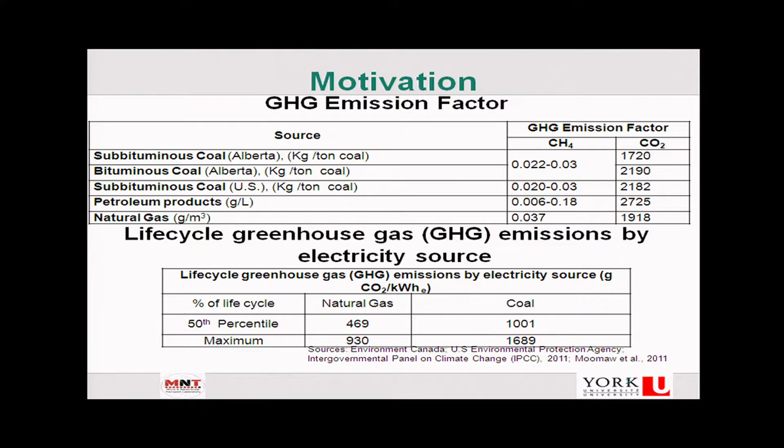I call this king coal, because coal still dominates the energy landscape, as I mentioned, among the various sources. And typically in India it is not a high grade coal, so there will be a lot of ash content, and that also creates a lot of pollution and so forth. These are some of the numbers which show the amount of GHG, greenhouse gas emission, which people are worried about in terms of burning coal.

So the question posed is, is there an alternate route without burning coal? Coal is a big chain carbon molecule, with nitrogen, hydrogen, sulfur; you can think of coal as a polymer in some sense, a thick meshy polymer. If you burn that, you will get CO2 directly. So is there a way to convert the coal into methane? Because if you convert that into methane, there is a significant reduction of GHG.

And if you look at the scaling, typically in India thermal power plants are in the 500 to 600 megawatt range. These are typically run by a corporation called National Thermal Power Corporation, NTPC, with 500 to 600 megawatt units. So if there is an opportunity to replace some of them using methane, it would be a significant cost reduction.

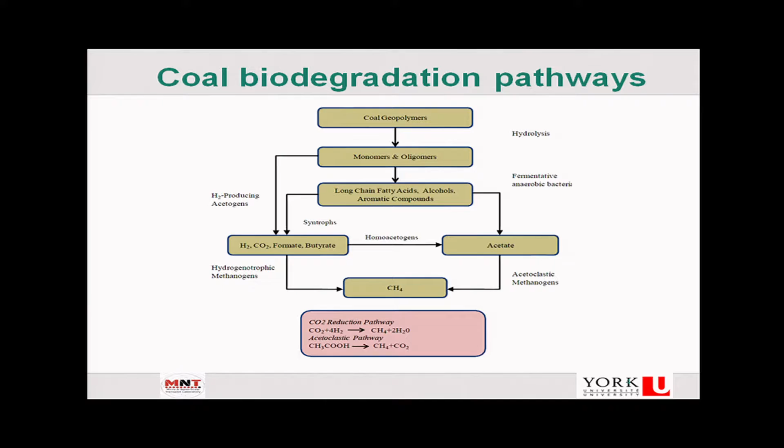So you will also get CO2 at the end, but of course the amount of CO2 is much reduced compared to if it was a direct combustion. So this is a complex biodegradation pathway, and the way we looked at this problem is similar to flow in porous media. Typically microbiologists take the coal samples and put them in a bottle. These are called media.

In the bottle, there is a head space in the media, and they will typically have nitrogen as inert media, and then they will put the methanogens and allow them to culture. The methanogens will then convert the coal into methane, and from the head space you take the methane or any other gas out, put it into a GC, and look at the gas composition. This is typically a bottle experiment, which is static.

In a coal field, things are not static, because this is below the earth's surface; you have flow of water, flow of other microbes and so forth. So we took the idea of core flooding I showed you earlier, which you do typically for porous media. We can pack these coals within a core holder or in a porous packed bed, and then feed these methanogens or microbes.

In order for microbes to survive, any idea what they need basically? They need a carbon source, or nutrient. So you have to feed some nutrient to it, so that they can thrive in that packed porous media. So we provided some nutrients. In this case, the carbon source is tryptone.

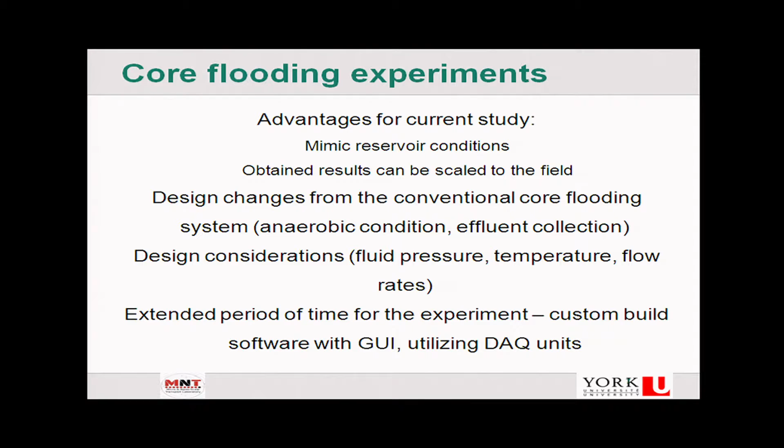So when you are dealing with this kind of system, you have to purge everything with nitrogen, so the entire system is inert. And also when you are putting in inoculum, the medium has water. Water always has dissolved gases, and typically oxygen will be one of them. So you have to take oxygen out from the inoculum medium. This can be a tedious process as well.

So this is a very complex system, really a mechanical engineering or chemical engineering process system. This is a process diagram we developed. Because it has to run for 50-60 days, it cannot be done manually. It has to be completely automated with some sort of GUI running, so that it helps to collect data automatically.

So essentially you have an upstream where a syringe pump is injecting the microbes, the nutrients and so forth, and downstream you have the so-called holders which help to collect the effluent, and then you can pass that effluent on for further analysis. Okay.

So this is what the system looks like. I always ask my students to have these experiments on a trolley kind of setup, which looks very neat, and you can move things as needed. This is the upstream side. These are the syringe pumps, typically from Teledyne, and then the downstream as well, where you have the piston accumulator, because everything needs to be pressurized.

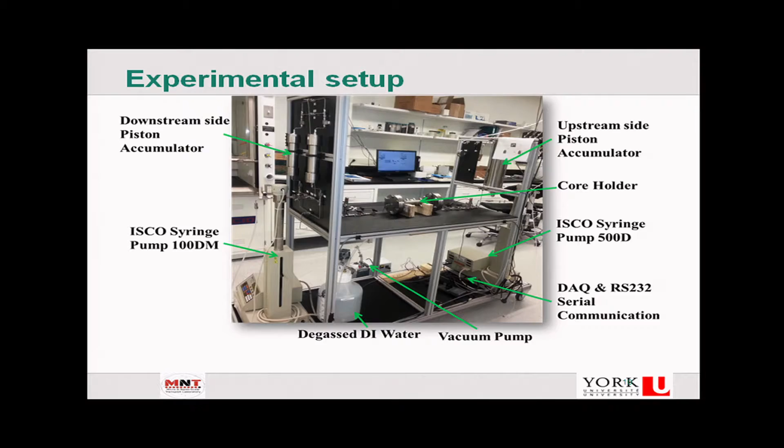We made this kind of GUI, and I believe you guys are much better in software development. This is using LabVIEW and CVI; we're programming in National Instruments CVI. You can make an emergency stop if there is a malfunction. We also had a camera, so for example at night, if there was a spill, we can shut down the entire process from home via IP address.

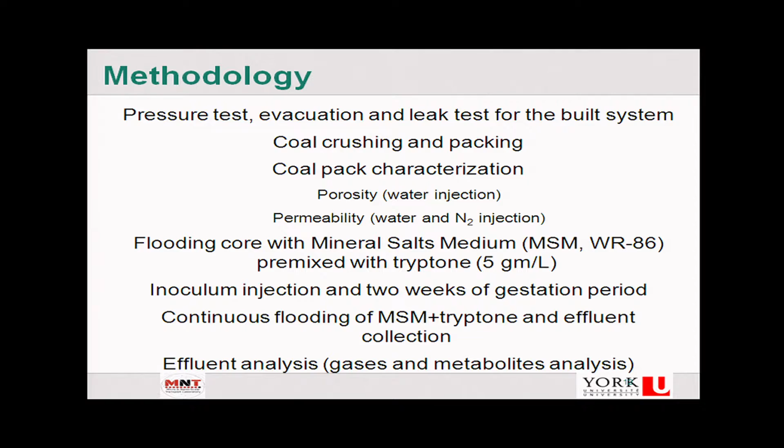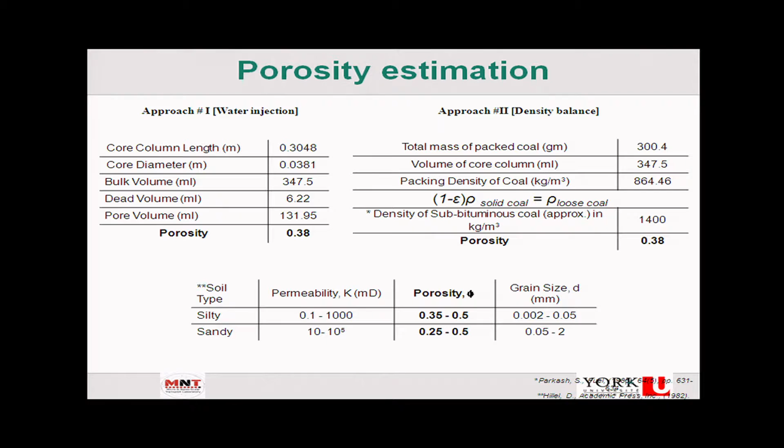So we measure a lot of transport properties like permeability, porosity, and so forth, which are important to characterize the porous media. As you can imagine, it went for 90 days, so you can collect a lot of data. For example, we can look at the porosity using water injection. As I mentioned, there are two different ways of measuring porosity: one is through material balance, and the other is by using water saturation.

When you calculate the permeability, you can then do some correlation. There is a famous correlation called the Kozeny-Carman correlation, which provides the permeability. The Kozeny-Carman correlation assumes that the particles are spherical, the way we have seen for the glass beads experiments before. So one can correlate those things as well.

And also, this is very interesting, which you will not see in most porous media: over time there is a permeability variation. And when I look at the SEM, I can take the coal at various time intervals, since we have the opportunity to unpack and take the coal sample.

For example, at the very end, after 90 days, there is biofilm formation, the attachment of the microbes. You can see the microbes attached to the coal structure. There is a proper formation of the colony, so to speak, of the microbes. That's very critical, maintaining that kind of proper colony formation.

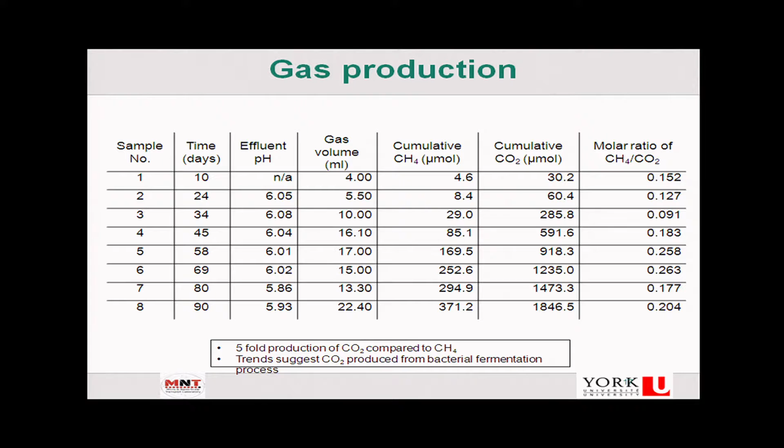We can look at what are the molar ratios of methane and CO2 and so forth, because as I mentioned, there are pathways that not only produce methane but also CO2. These are soluble, right? So you have to do some solubility correction. So how does one do solubility correction?

In chemical engineering you should know: by using Henry's law. You can use Henry's law to correct for the solubility, because as I mentioned, the CO2 or methane will be present within the effluent. So you have to make some solubility correction to get the actual quantity of carbon dioxide and methane. You can see the values with and without solubility corrections; these are experimental values that are shown.

In terms of your question about economics and whether it makes sense economically, the advantage is you are getting other value-added products like acetic acid and succinic acid. If you are in chemical engineering, you may be aware succinic acid is used in the pharmaceutical industry in a very big way and is very expensive as well. However, through this bioconversion pathway, you can get succinic acid at a very good rate. So these are the value-added products you can get out of this process.

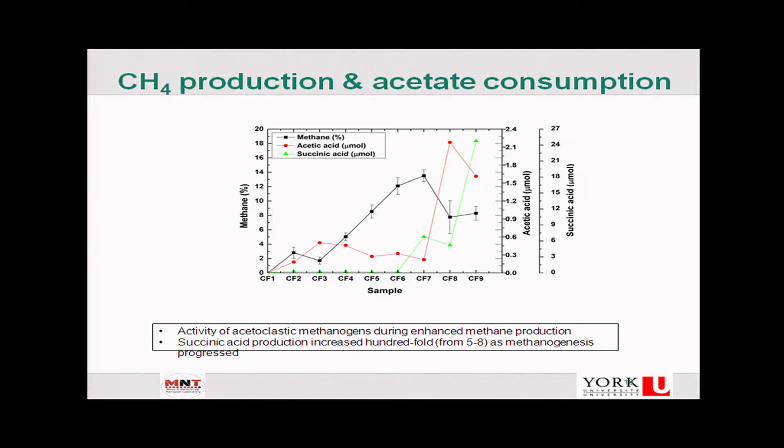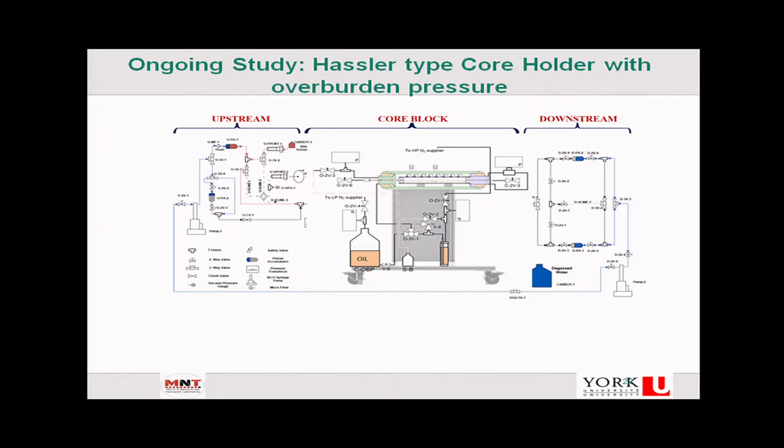Then you can put some overburden pressure as well, to look at the impact of pressure in the system. In this case we maintained a constant pressure into the core through an oil system, and we designed these core holders. This is now the biggest size when you maintain the pressurized system, and we always make sure health and safety is paramount in our work. Visitors shouldn't jump inside the experimental setup; sometimes people get so excited they want to touch it, so we make sure people are not getting inside.

With this new system, we also have a number of pressure and temperature taps. One thing we were interested in is the natural temperature, because these methanogens thrive at a particular temperature. We want to register the temperature change in the system and what the optimal conditions are.

So I think this study gave us a way to understand that, beyond typical combustion, as an energy source we can use advances in microscopy as well as flow in porous media to tackle these kinds of challenges.

Okay, and of course in this work I have the entire team, which has people from geophysics, because we have to understand how the geological formations of coal are. Then there are hydrologists, people who look at the water chemistry.

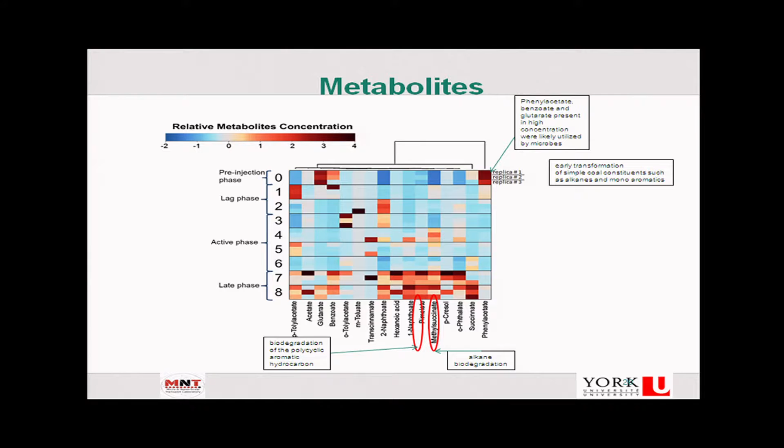Any questions? Okay. So next, let's look at another part of this energy, which is the fuel cell. A fuel cell is an energy conversion device which directly converts hydrogen and oxygen into electrical energy. How many of you are aware of fuel cells? Anyone? Not much, so I may provide you some more background on this.

Typically, there are fuel cell cars, and now people even have battery operated cars. For example, Tesla, Elon Musk, is one of the pioneers of battery operated cars. These are lithium ion battery operated, but there's a big difference between a fuel cell and a battery. The fuel cell is an energy conversion device, whereas a battery is an energy storage device. Let's look at what a fuel cell looks like. A fuel cell at its heart will have something like a,

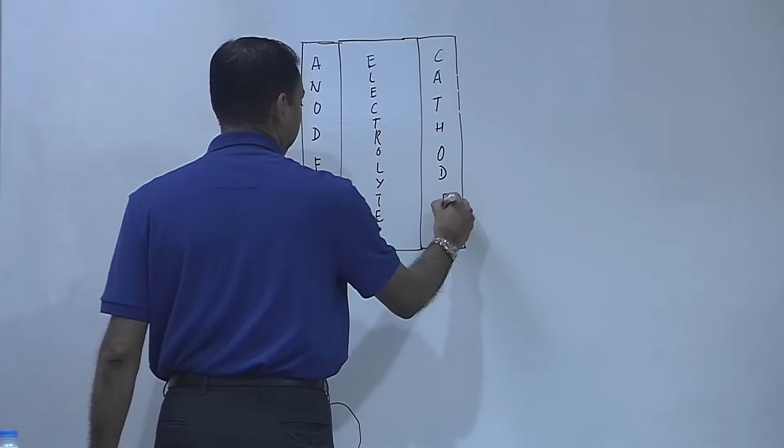So you have the electrolyte, and then there is the cathode. These are electrodes, and then there are flow paths, often referred to as bipolar plates, which provide the flow conduit. So in a fuel cell, this is pretty much the structure: an anode, a cathode, and an electrolyte sandwiched in between. Then, for example in a hydrogen fuel cell or a PEM fuel cell, you bring hydrogen, which is the fuel.

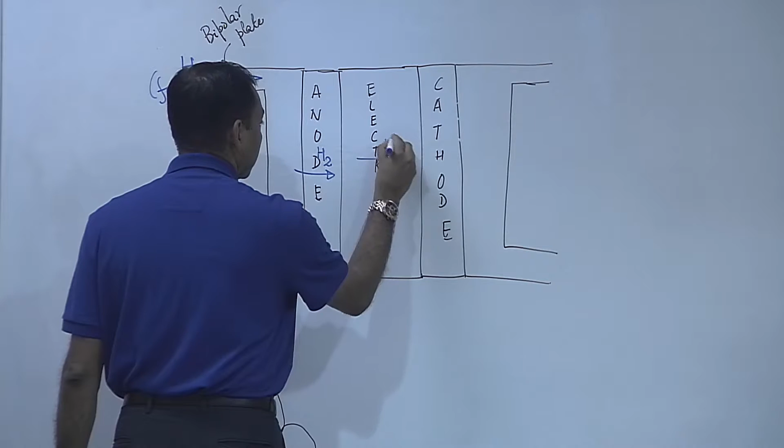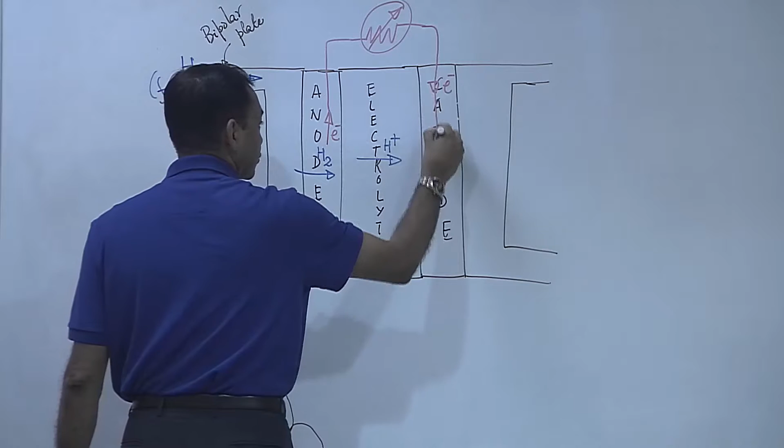Hydrogen will go inside through the anode. Then it will create protons, and while creating protons it will leave electrons out. These electrons will move through the outer circuit, and this is where you can put a bulb or something and generate electricity. Then these electrons will come in contact with air, or in other words oxygen. The oxygen will come in, they will react and produce water.

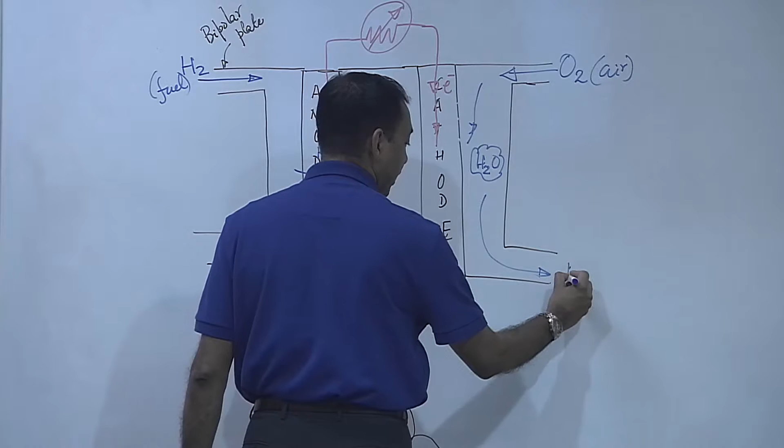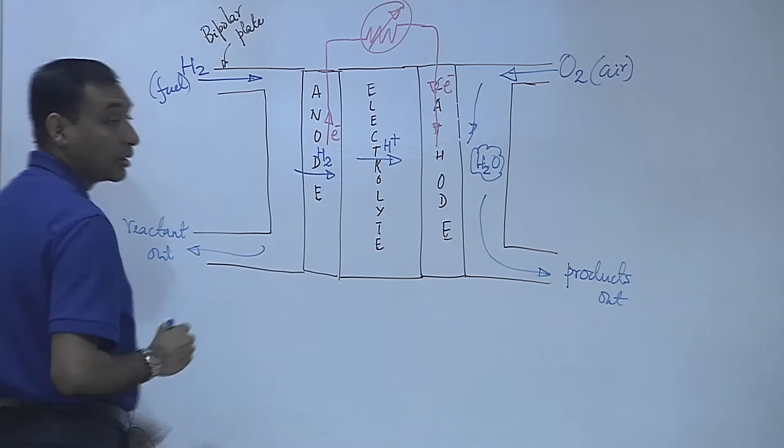Excess oxygen and the products go out. So this is where the reactant, or the fuel, goes out, and this is the product out. So this is what a fuel cell looks like: hydrogen and oxygen forming water. The water produced is always a challenge, because

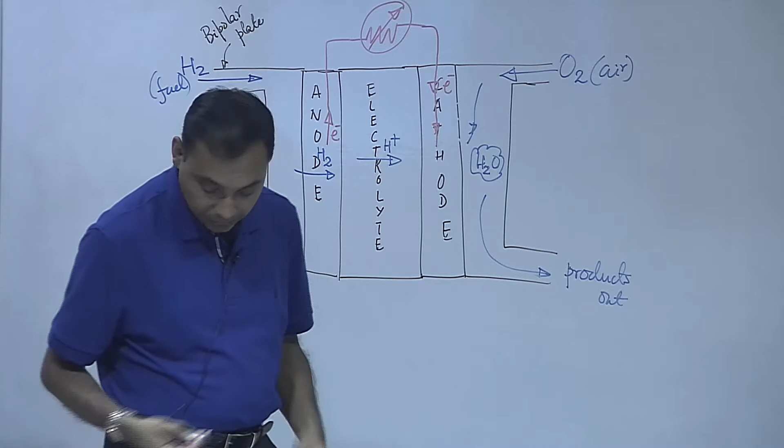if I look at this part of the cell and zoom into it, what I will see is it is made up of a lot of fibers. These are fibrous material, referred to as the gas diffusion layer. So essentially the gas diffusion layer is a porous media.

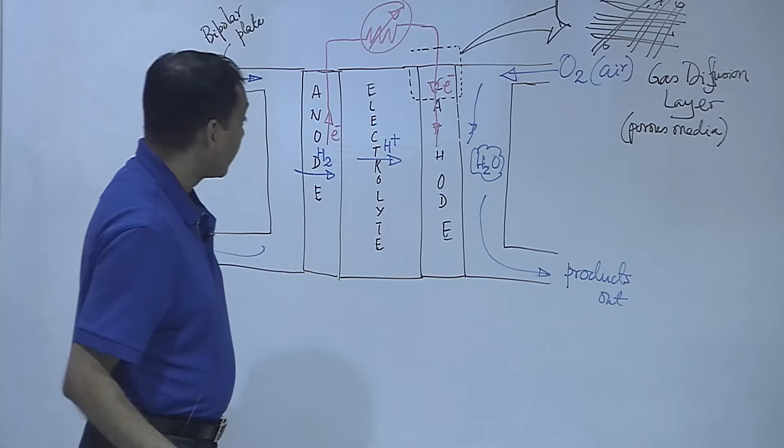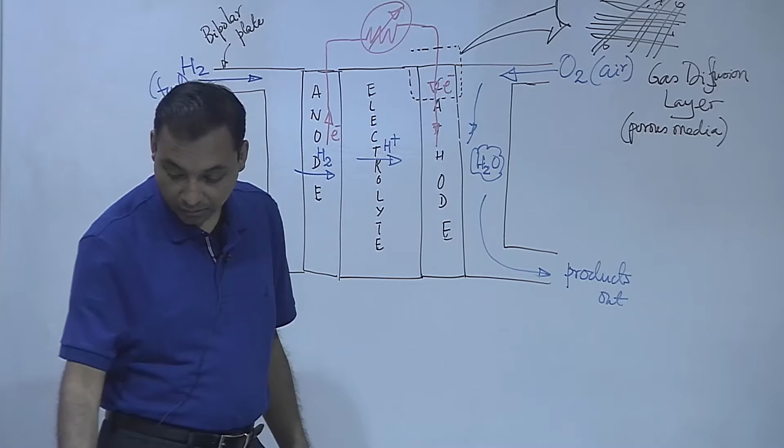So when you are operating this fuel cell, you don't want water to block the pores. This porous media has pore sizes somewhere in the order of maybe 100 microns. So this is both the cathode and the anode. These are porous media, which is referred to as a gas diffusion layer.

Typically, the commercial name of this product is Toray paper, or a carbon cloth. But as I mentioned, this water that is produced can be detrimental to the fuel cell because it can flood everything, right? If there is flooding, then the reaction may stop.

So how can one prevent this water moving back? What is the way you think we can arrest water? Keep the whole setup pressurized so that the water cannot move. Well, water will go through some gradient, right? So there could be some diffusion of water in the system. We could use this water itself to produce oxygen. No, using water to produce that is a very difficult job. Splitting of water is an energy-intensive process.

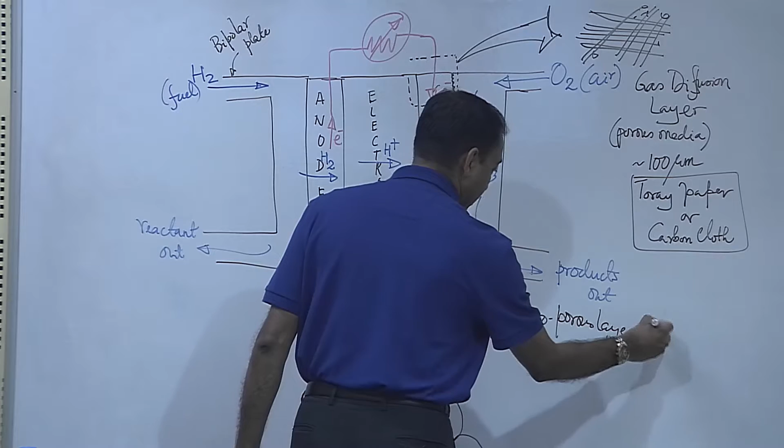So you have to work with the pore size. The way we arrest the water is we actually put another layer in here, which is referred to as MPL, the microporous layer. Here the pore size is in the nanometer regime, and that allows us to avoid any kind of backflow of the water. So that's another challenge.

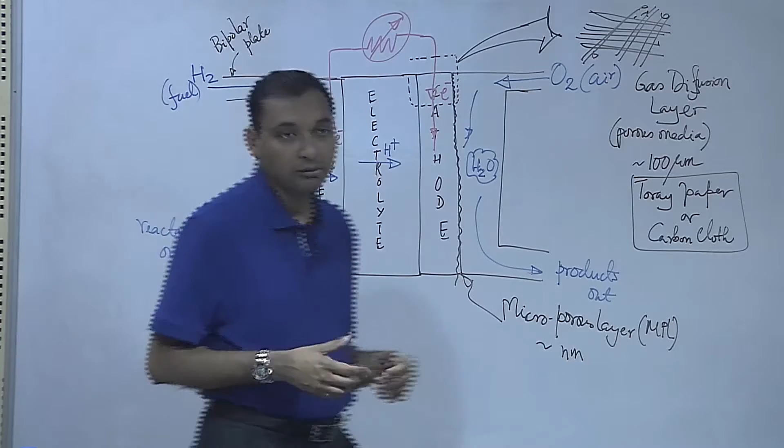So one important thing: why in this case will hydrogen produce a proton? If I put hydrogen in any porous medium, will it produce a proton? What is the reason? Why is such a reaction taking place? Anything bombarded at high speed can create a proton? Is it possible? Think about it. This is your high school chemistry. What is the requirement for a reaction to sustain? Catalyst, right? So I have to put some catalyst in here.

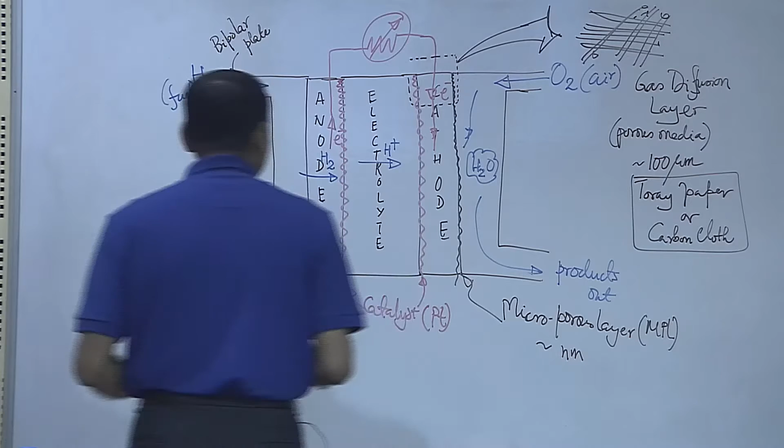So I put some catalyst. So this is a catalyst. Typically it will be a platinum catalyst, so that's why it becomes expensive, but the loading will be a very small amount of platinum. If I zoom into this area, what I will see is that you will have the catalyst layers.

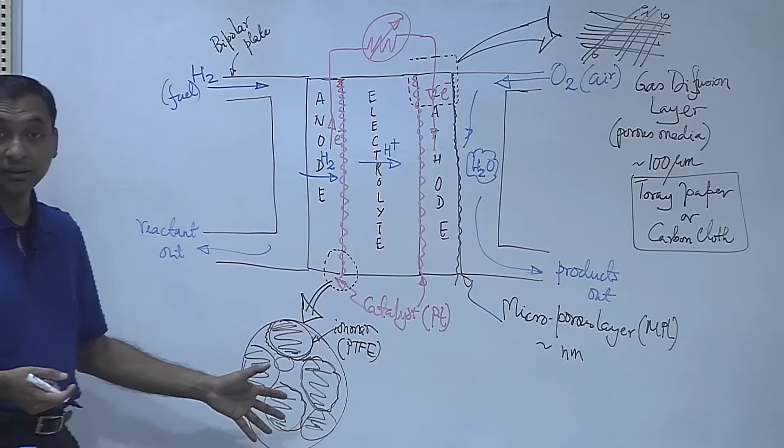They need to be bound, so some binding material, an ionomer, will be there. Typically the ionomer is PTFE, Teflon, so you will see some Teflon bound in this process. So it's a very complex system because it has the ionomer, the platinum catalyst, as well as the carbon paper, the gas diffusion layer itself. It's a 3-phase problem. The 3 phases are the ionomer, the platinum catalyst, and the carbon black coming from the GDL.

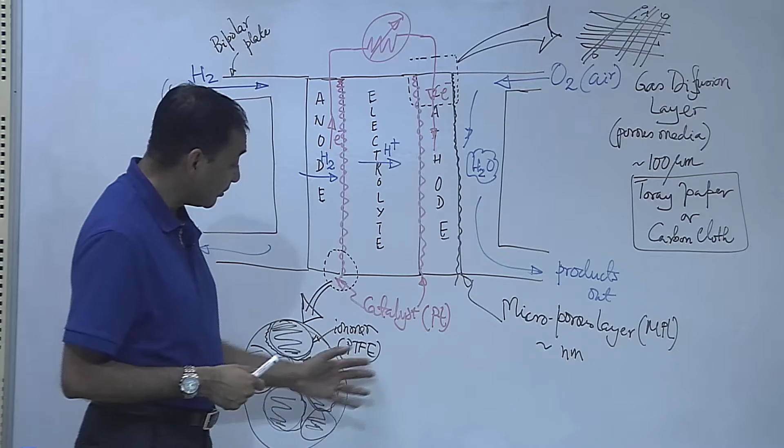Everything is present all together, and the electrochemistry will be highly dependent upon how much ionomer I put inside this catalyst layer. So something is happening here in terms of chemical reactions; there is electrochemistry involved. What else is involved? So reaction is there, what else?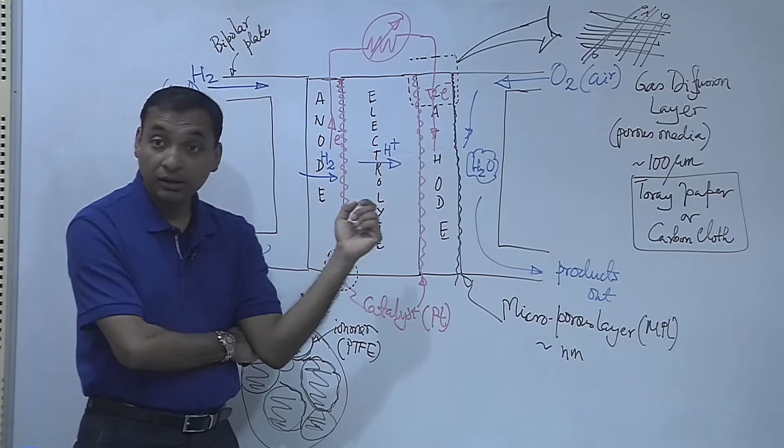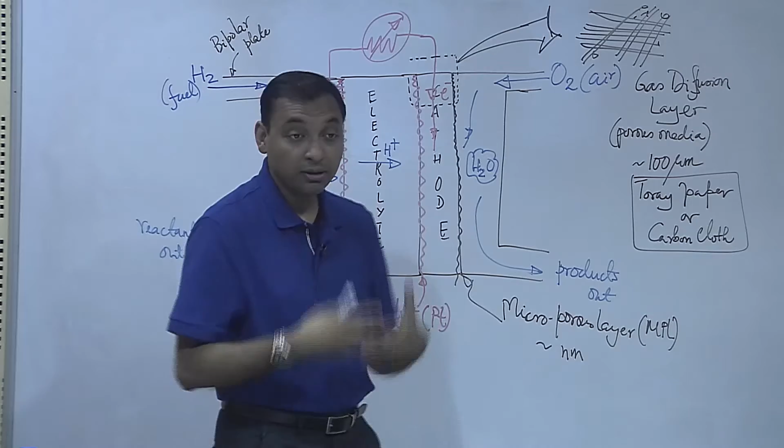So there are flows, right? There is flow in the system. What else is happening here? Ion transport is there, right? And overall there is charge transfer because electron transfer is also taking place. So this is one of the most fantastic micro-nanoscale transport systems you can ever see. It has everything built in. Most systems we study don't have electrochemistry, but this has it because all the chemical reactions are taking place.

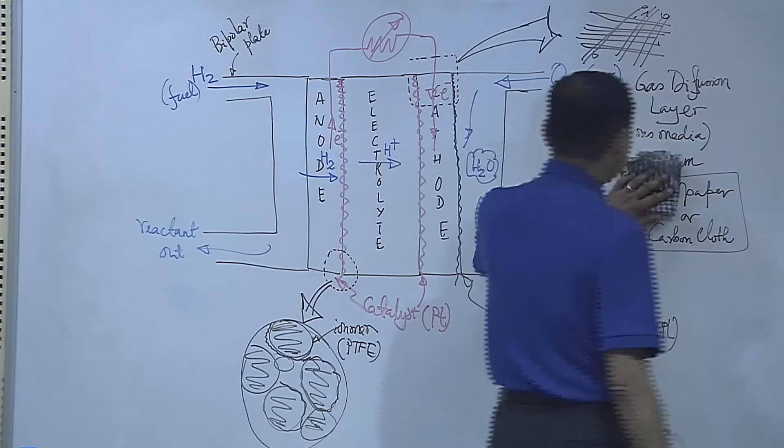So let me see where I can write, maybe in here. If I have to write conservation equations for this kind of system, what kind of conservation equations will they be?

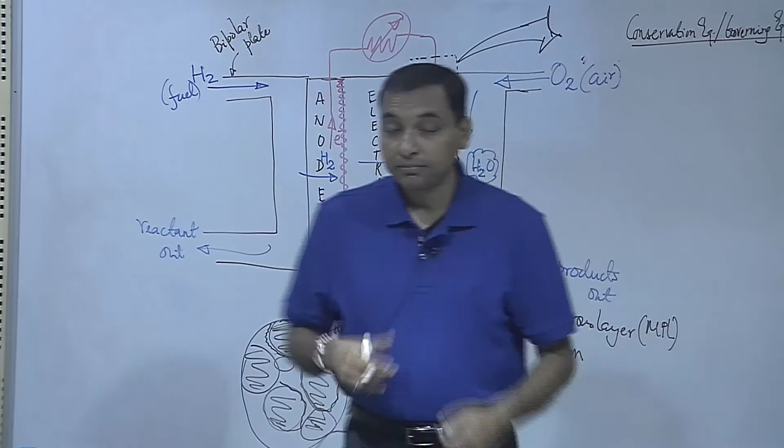Or governing equations? So there is a mass conservation, right? So that's the fundamental of our equation. So we can write some mass conservation equations.

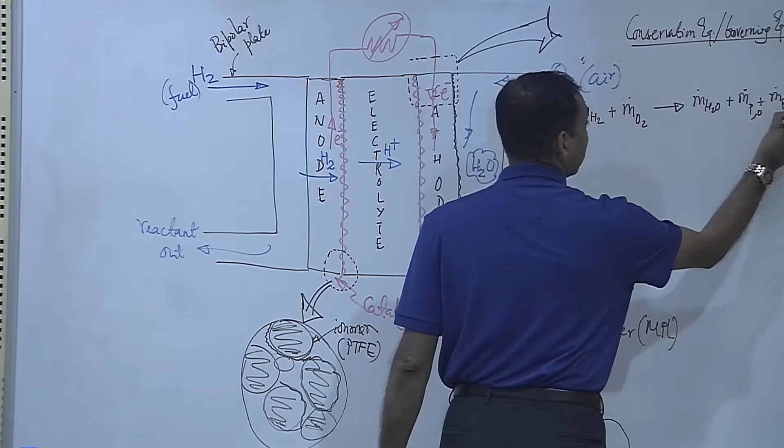So mass of hydrogen plus mass of oxygen coming in equals mass of water that is produced plus mass of the reactants that are coming out, which is unspent. So it is the mass of the products, MP, plus reactant unused, so product out plus reactant out, which is the unused fuel as well as the unused part of the air. Okay. So this is one conservation we can write, correct?

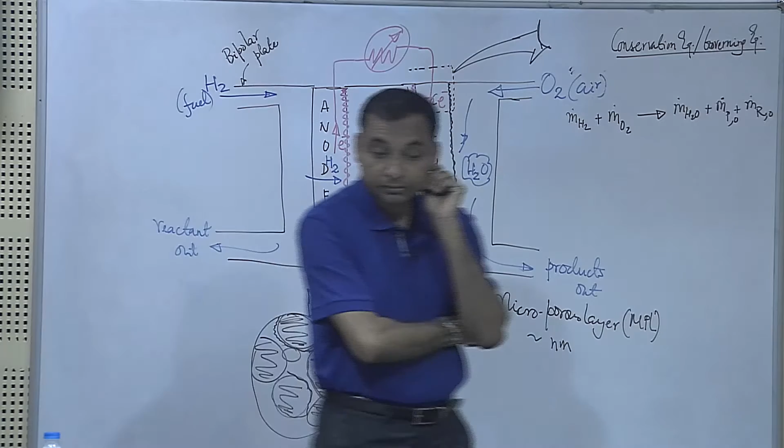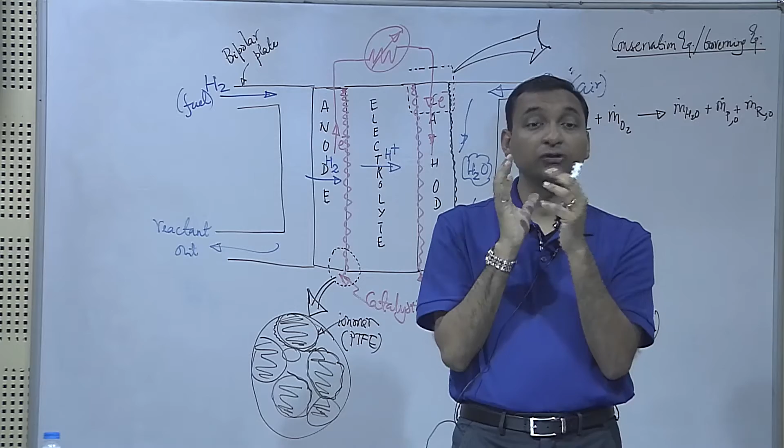What about energy conservation? How we can write energy conservation here? So when you're writing energy equation, you have to have a control volume, right? So a control volume should be around this. So when I have a control volume around this, anything which is happening inside shouldn't come into your picture, right? So how one writes energy equation, are you aware?

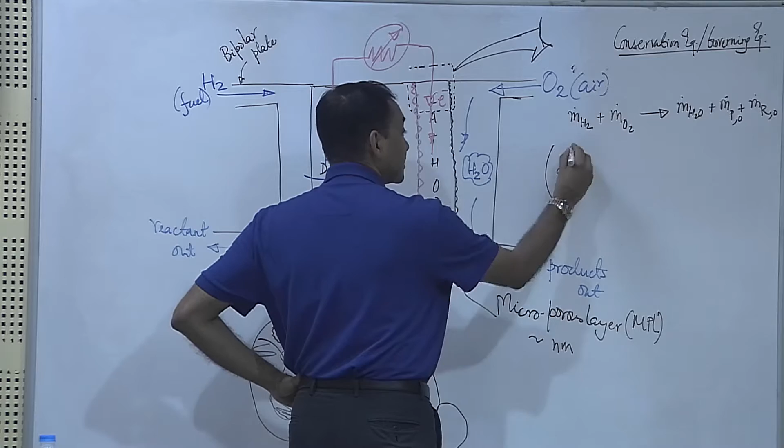So any conservation equation is written in this form: change of things within the control volume, in this case energy, is equal to energy that is coming in minus energy that is leaving the system, right? So this is any conservation principle, same as mass, except for mass there is no change of mass within the control volume, so this term gets 0. Mass in is equal to mass out.

Change of energy within the control volume for a steady state process, if the system has achieved steady state, becomes equal to 0. So then energy in is equal to energy out, correct? So what is the energy that is coming in? Hydrogen. How we can quantify that energy? With the enthalpy, right? So m dot H2 times the enthalpy of hydrogen plus m dot O2 times enthalpy of oxygen is equal to the enthalpy of water, the product out, plus the reactant enthalpy.

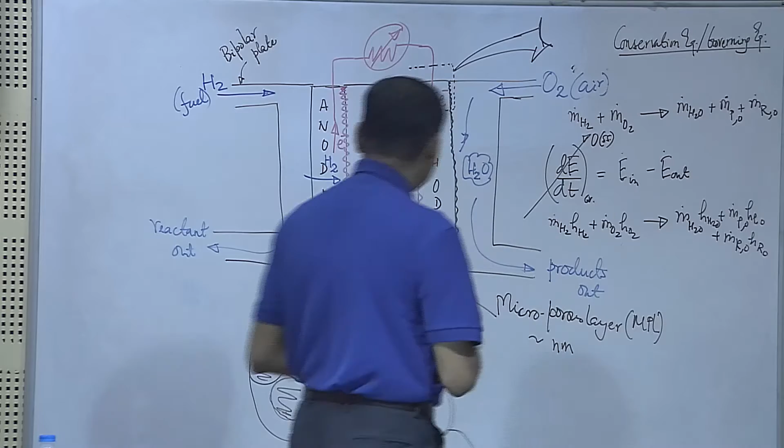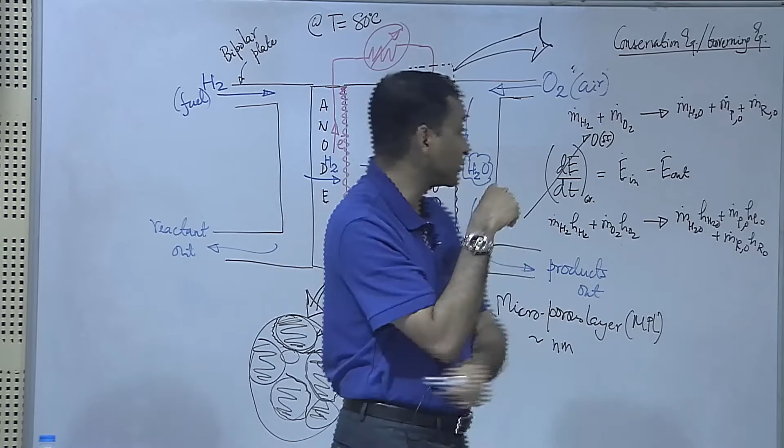Now, how we get these enthalpy values? The cell is operating at a temperature, typically around 80 degrees C or something like that. So how are these enthalpies calculated? Through enthalpy of formation, right? So we have to look at the value of delta H in the table that provides these enthalpy values. There is something called JANAF table, so we have to look at the JANAF tables.

There the standard heats of formation for hydrogen, oxygen, water are given. These are given at STP, so you have to make a correction for the change of temperature. Everything is given at 25 degrees C, where the enthalpy of formation of elements is 0. So anything beyond that, you have to add that delta H value and then come up with this. Okay?

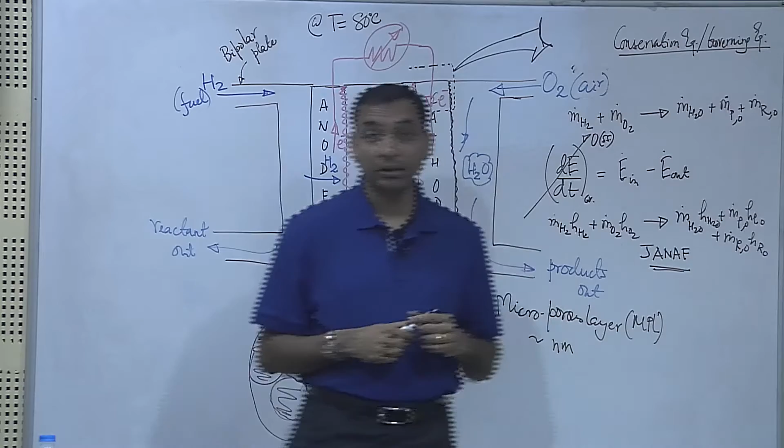What about the second law? How we can write second law for this process? Not sure about second law. So always remember the conservation way of writing. I can write second law as the change of entropy within the control volume, dS/dt, equal to entropy that comes in, m times s in, because there is a mass flow rate, minus entropy that leaves the control volume, m times s out.

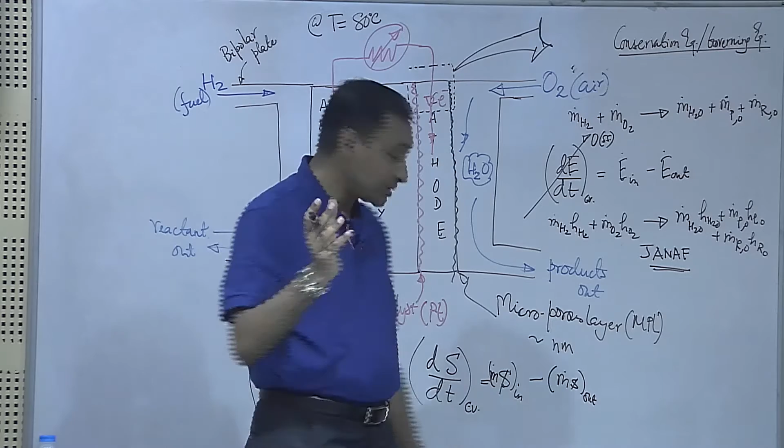What else is there? That is the only difference between energy and entropy: there is an entropy production term, which is greater than or equal to 0. Equal is for a reversible case. Don't get scared about second law. You can always recast this in terms of conservation equations, right?

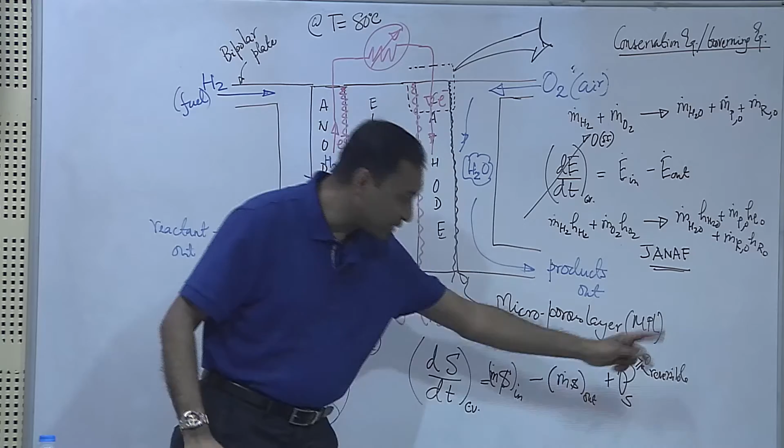So change of entropy within this control volume is due to entropy that comes in and entropy that leaves, same as energy, but energy cannot be produced or destroyed, so there is no energy production term. If we were able to do energy production, our energy crisis would have been solved. But for entropy, there is an entropy production term, which for a reversible process is equal to 0, and for a real, irreversible process greater than 0.

Again, for a steady state problem, this is equal to 0. If this fuel cell has reached steady state at a temperature of 80 degrees C, then we can plug in these values of S in and S out, and then we can find the entropy produced for the system as well.

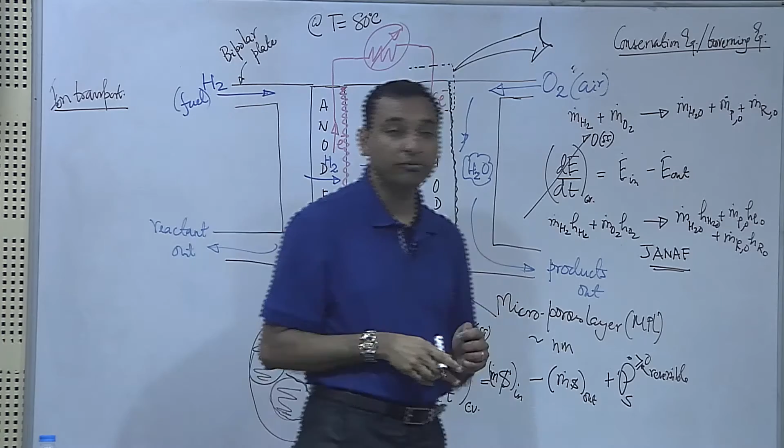Also, there is the ion transport. So, ion transport, the governing equation: if I have to understand the ion transport, what could be the governing equation for ion transport? You have learned this in your ion transport in electrokinetics, something called the Nernst-Planck equation. So, we will use the Nernst-Planck equation.

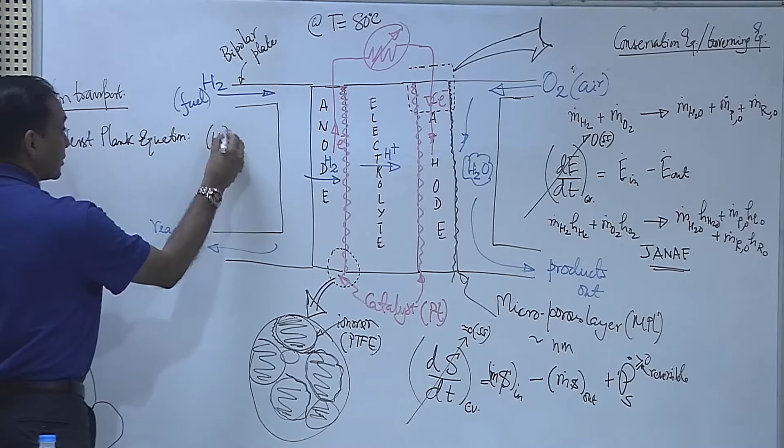So it will have the coupling of the ionic flux and the velocities, right. So, the velocities and the ionic flux will be coupled in this. So, this is ion flux and this is the velocity. So, they are coupled in a Nernst-Planck equation. Okay.

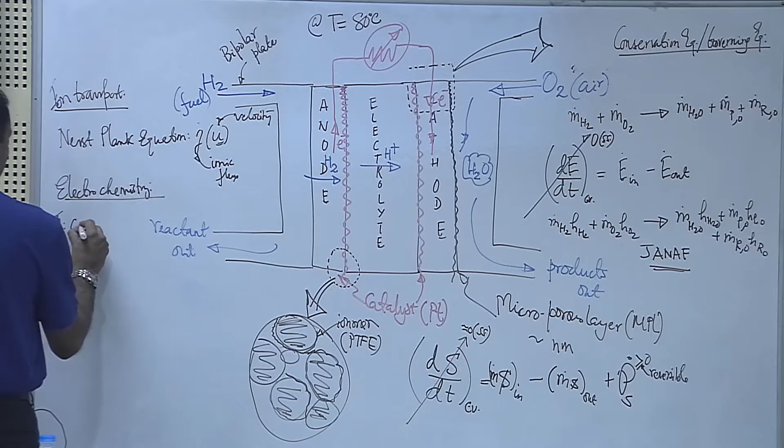Then you have the electrochemistry. Electrochemistry will provide us with the current density, I, which is provided through something called a Butler-Volmer equation. So the electrochemistry is defined through a Butler-Volmer equation, where the Butler-Volmer will dictate, because you have the platinum catalyst, how much coverage of that catalyst, what is the type of kinetics that you are using.

So based on that, you can find out the current density, and that again can be used in the Nernst-Planck equation. So you can see U is again present in here, right, for the mass flow rate and so forth. So it is a highly complex problem. It's a very coupled problem that you need to solve.

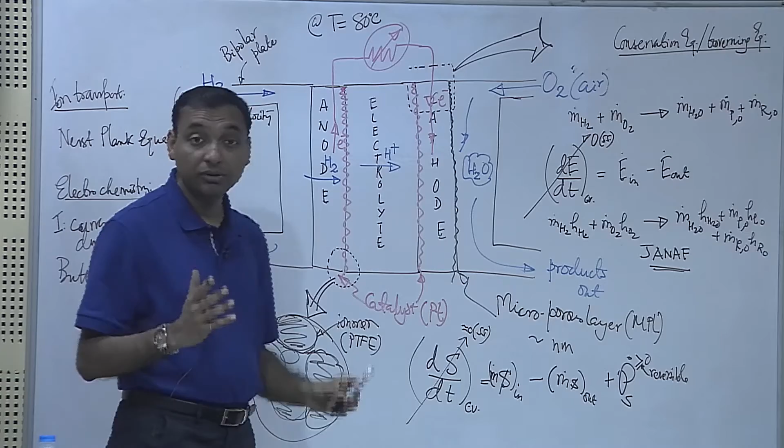This is non-trivial, and you have to worry about various boundary conditions as well, so you have to assume some concentrations, ionic concentration, as well as the flux concentration. So what is the concentration of oxygen, hydrogen at those layers? You have to have a fairly good idea about these things.

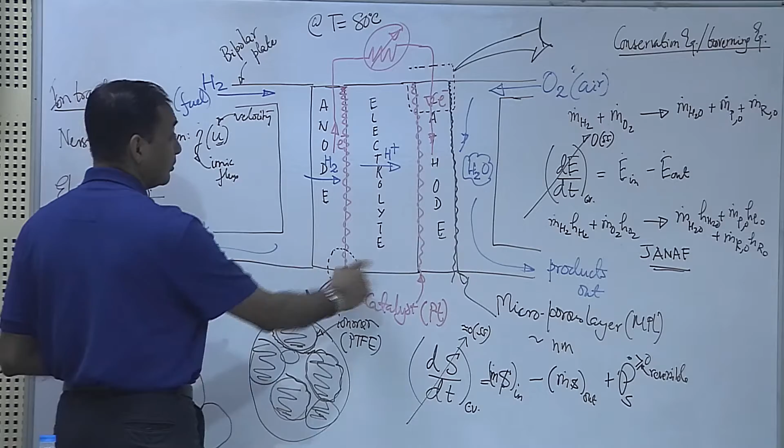Okay. So even though this fuel cell itself looks benign, the modeling of the fuel cell is very complex, and it has various scales as well. So these are in terms of micron to millimeter; these are flow paths which are in millimeter. So there are various scales present in the system. So it becomes a very complex problem to solve. Any questions you have on these?

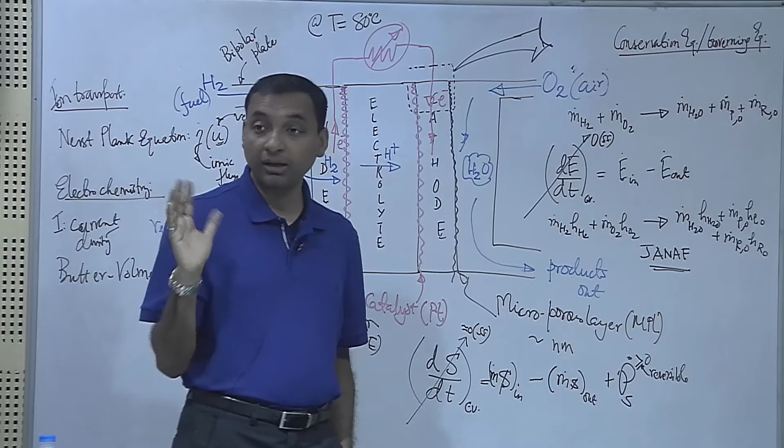I believe you have done ion transport, right, in your first part of the lecture? So you are aware of how to deal with the Nernst-Planck equation. So essentially you look at how the mobility of this ion is taking place in the system. So this electrolyte is a proton exchange electrolyte. It is available commercially through DuPont. This product is referred to as a Nafion membrane.

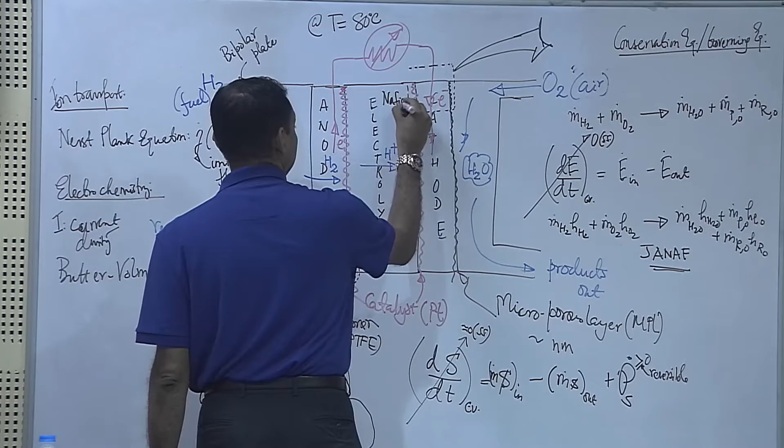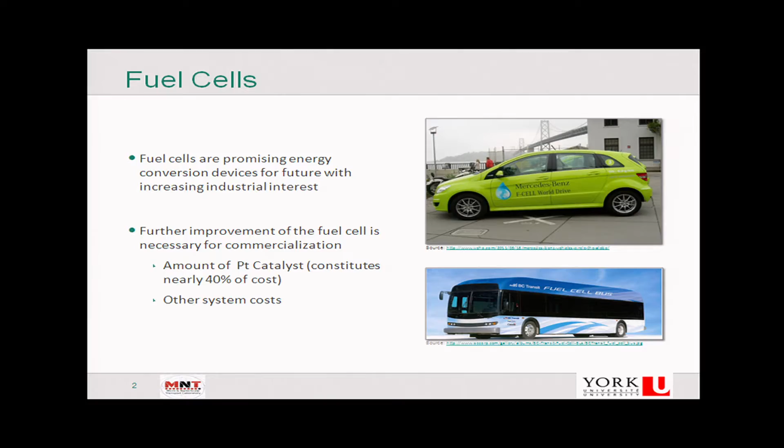So Nafion is the membrane, which is a trademark of DuPont, which you can buy, which will allow protons to move in it. So it has a sulfonic group. So the proton hops through this sulfonic group of that membrane, so that it allows the proton to migrate. Okay. So this is what DuPont sells in the market as a Nafion membrane. Is this clear? Any question on this?

So at the end, what you will do is you will start drawing current. So when there is no current, the EMF of the cell, the electromotive voltage of the cell, is at the highest. The moment you start drawing the current, it means the cell reaction has taken place. So it has to overcome some activation barriers. You may recall in your high school physics, there is the reaction coordinate and the product coordinate. So the reactant goes into the product through an activation barrier.

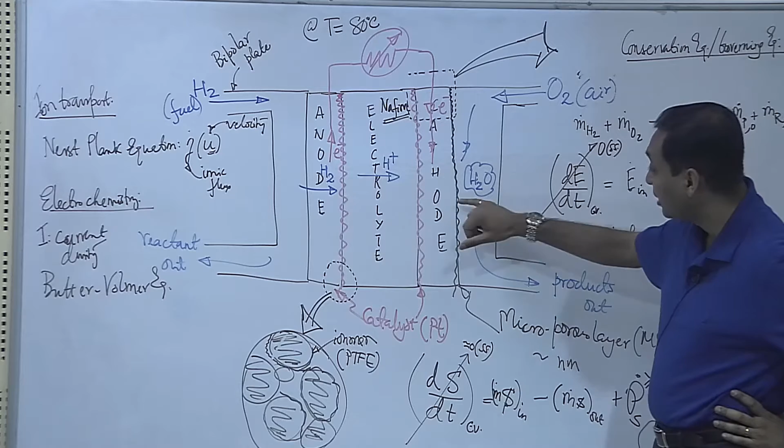And that's where porous media and the transport become very critical, because here the hydrogen or oxygen is transporting not only in the water molecules that we are talking about, but there is transport across the various scales of the porous media, as I have drawn earlier, because you have a GDL, which is a larger pore, micron, and the MPL, which is a smaller pore, nanometer scale. So the transport across this porous media becomes very critical.

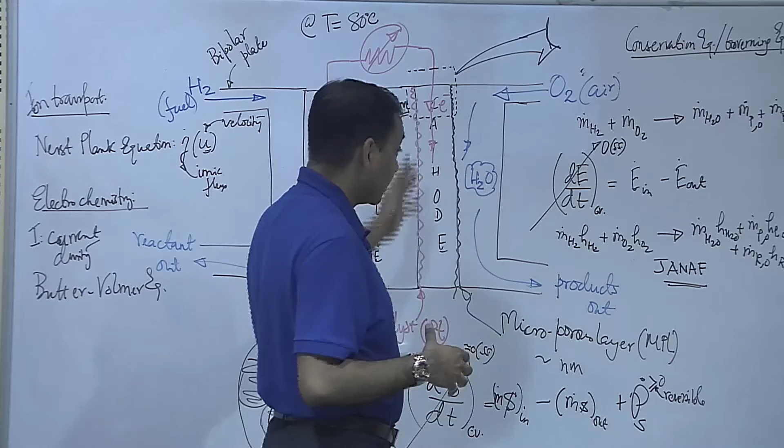And what else? What other complexity do you see in this? This is fundamentally one big challenge in this fuel cell as well. Typically you will not be using oxygen, right? Air is the one which you plug in. Air is a multi-component system. It has oxygen, nitrogen, water vapor, and so forth. So the biggest challenge in this case is multi-component diffusion. Okay.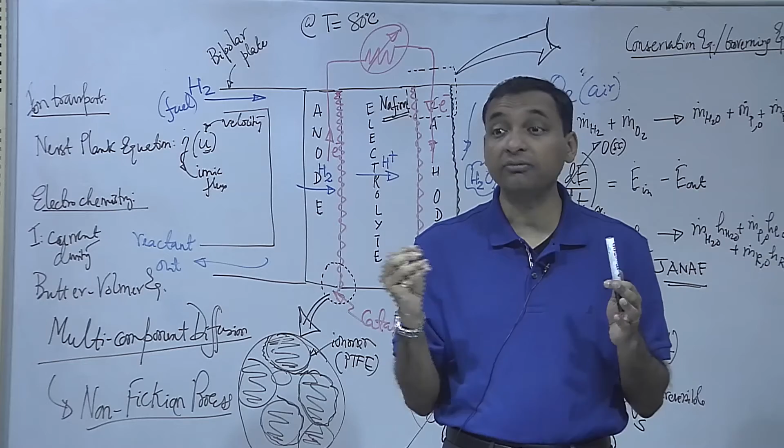So that means this is a non-Fickian process. Fick's law is no longer valid in this system because it's a non-Fickian process. Fickian diffusion is only for a binary system. If there was only hydrogen and oxygen diffusing, it would have been Fickian. You have the ion here, you have the water, so it's a completely multi-component diffusion system. So it's a non-Fickian process, and that's what makes it more challenging as well.

So we tried to gain some understanding of the diffusion and overall transport mechanism of the fuel cell. What we did is we take the porous media, either the anode or the cathode, and put it into a diffusion bridge. Essentially there are parallel channels, you put a porous media into it, and then you allow hydrogen or oxygen to diffuse within the porous media.

What you are trying to address is the effective diffusivity of these materials, because if you look at scanning electron microscopy of any gas diffusion layer, these are fibrous materials and they are intertwined. They have in-plane permeability as well as out-of-plane permeability, in the Kx and Ky directions. A very complex porous media. And on top of that you have the MPL, the microporous layer. So you have to understand the effective diffusivity for these kinds of systems.

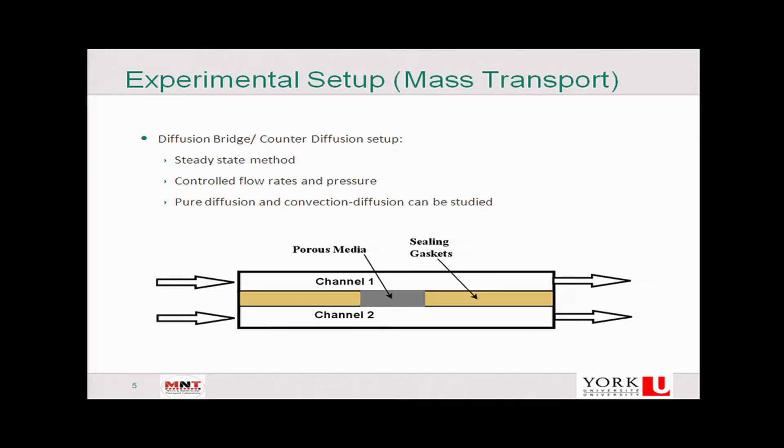Permeability is also a challenge, because then you have to measure the permeability. As I mentioned, permeability can be measured through a pressure drop. So we blocked either end of the channel to allow the fluid, in this case oxygen, through. We are looking at permeability throughout this porous media with respect to oxygen. We measure the flow rate through the flow meters, and then we calculate the permeability of the system.

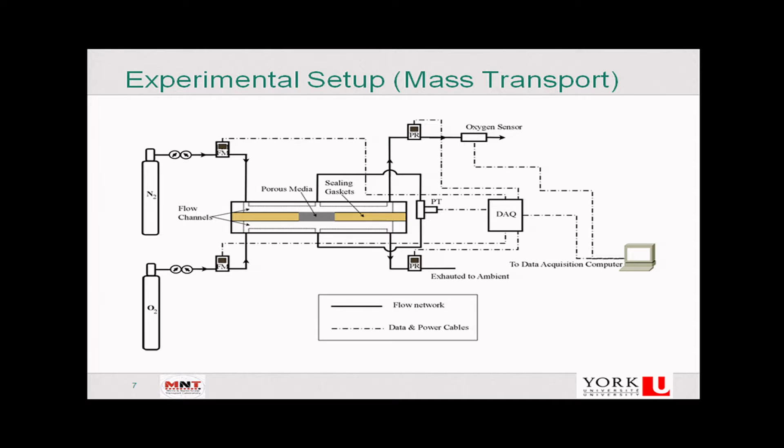We also calculate the mass transport, in other words the mass flow rate of nitrogen and oxygen. So now you have a dual system, nitrogen and oxygen diffusing into each other, and we measure this at the exit as well. This is typically an experimental setup, all in a panel, and then you have a data acquisition system to run this.

So these mass flow controllers are very critical, because the precision of the mass flow controllers is extremely critical for this system. So what is the experimental data that you look at? What you look at is the mean velocity versus the pressure drop. So that is one data that you will be interested in. The other is the mass flux or the oxygen flux versus the pressure drop.

Then what you do is you apply some transport model. So that's where the challenge, as I mentioned, of fuel cell is. Just doing experiments alone will not give you the results because of the complexity of these diffusion processes, where there is molecular diffusion, there is Knudsen diffusion, because in the microporous layer the pores are in the nanometer range, and there is a bulk flow, because here you have nitrogen and oxygen sent through at a given mass flow rate. So there is a bulk flow, so there is convection taking place. All these mechanisms are coupled in this case.

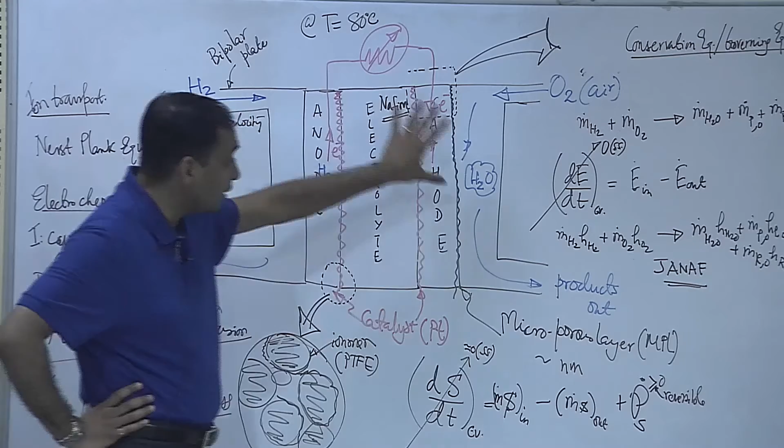Since the process occurring here is typically higher than room temperature, at about 80 degrees C, what are the effects of temperature on the porous media flow in these cases? So the temperature impact will be of only two natures. It can go up to 100 degrees C as well. If it is going slightly around 100 degrees C, the impact is in the water. It will no longer be liquid water, it will be in the vapor state, so that will have to be taken care of. Typically you want to keep everything in the liquid state, so anywhere between 60 to 70 degrees C, so that the water is still liquid. And that has an impact in terms of the open circuit voltage.

So E, the electromotive force when there is no current drawn, how can one calculate the EMF of a cell? What is it a function of? It is a function of the Gibbs free energy. So it is based on the Gibbs free energy corresponding to the water molecule as liquid water versus water vapor. So then the cell voltage at zero current will vary. That is the only implication in terms of the temperature.

From where will we get the hydrogen? From a chemical reaction? Hydrogen, you have to produce. There are various ways to make hydrogen, and it has to be stored either in a cylinder or in metal hydrides, where you can depressurize the system and it gives hydrogen. So this is a challenge. That's why batteries are now becoming more attractive, because the lithium-ion battery doesn't need any kind of exotic fuel. With hydrogen, our challenge is our economy hasn't moved into a hydrogen economy, so it is expensive in the first place to produce hydrogen.

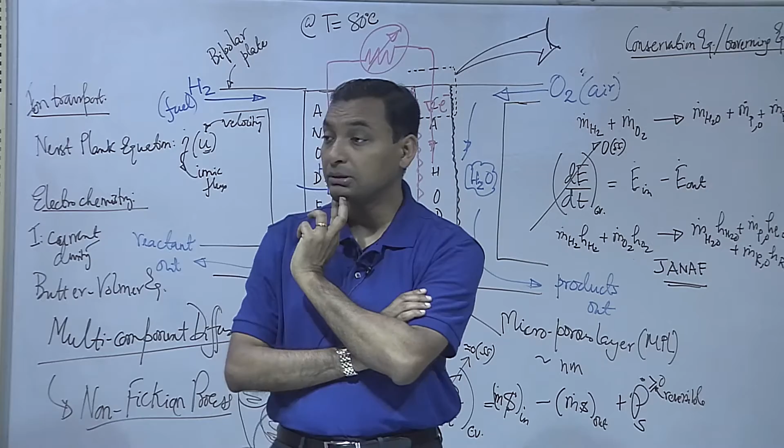What he means to say, sir, is what if we generate oxygen also by some chemical process, similar to generation of hydrogen? What if we break water into its elemental components? Not by breaking water, because if we break water by electrolysis, then again we will consume energy. Yes, exactly. What if we generate oxygen by some chemical process, so that we can let in pure oxygen instead of air? No, okay.

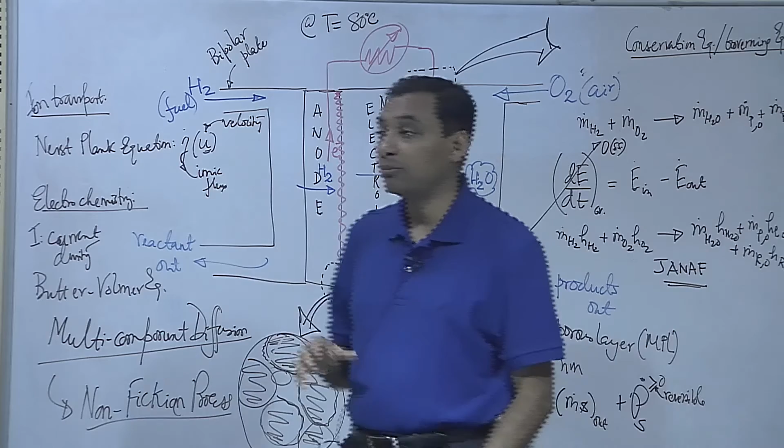So you are saying instead of air you can have oxygen coming in, but still you have the water, the diffusion of water and the diffusion of the ions. You're still there, right? So even if you have a hydrogen, oxygen, water system, it is a 3-component system, right? So still you will have more than 2 components to deal with at a minimum, basically.

But typically using oxygen alone is not an economical way, because air is much more freely available. So just using oxygen may not be economical.

And how do we counter the reducing as well as the oxidation properties of hydrogen and oxygen individually on the material of the battery? Battery? No, fuel cell. Fuel cell, sorry. So how do we counter the hydrogen is reducing? Electron is giving out. So what if the hydrogen and the oxygen reduce or oxidize the material compound?

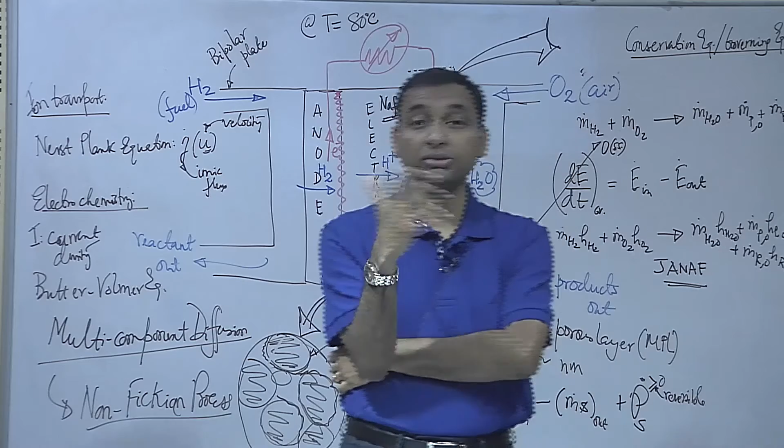These materials, you mean these anode, cathode. So these are inert. These are all carbon-based compounds. There is no physisorption or chemisorption of hydrogen taking place. The only place where hydrogen can have some impact in absorption is in this bipolar plate. So what they do is that they coat this bipolar plate such that absorption of hydrogen doesn't take place. Otherwise, in neither of these cases could there be any issue about hydrogen absorbing the material. Okay, anything else?

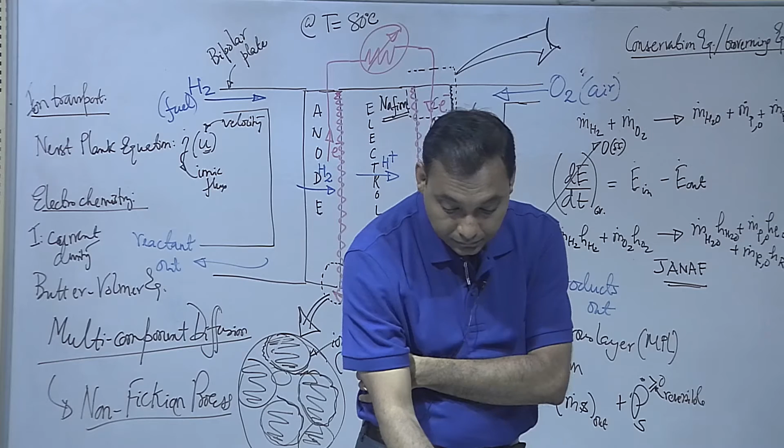The second part of the problem is more complex, because when we have multiple components, or Knudsen flow, where the gases are not only colliding among each other but with the wall, because the passages are so small, then we have to deal with the Stefan-Maxwell understanding of gas dynamics, or of diffusion. So we have included a binary friction model, essentially looking at the Stefan-Maxwell equations. These are fundamental equations, though the derivations are complex.

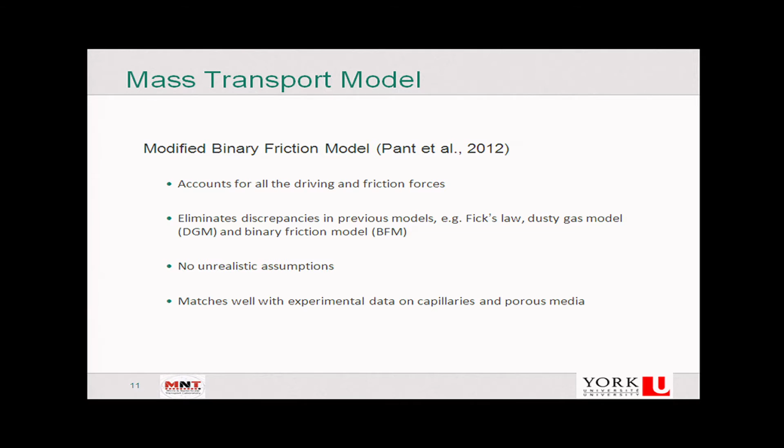So, as I mentioned, there are various ways to look at it. These are referred to as a binary friction model or dusty gas model. These are quite involved, and I gave you a glimpse of it. This is where the interspecies forces, or Stefan-Maxwell relationship, has been invoked in terms of the chemical potential, because each species is interacting as well as bombarding with each other. So you have to look at that species transport.

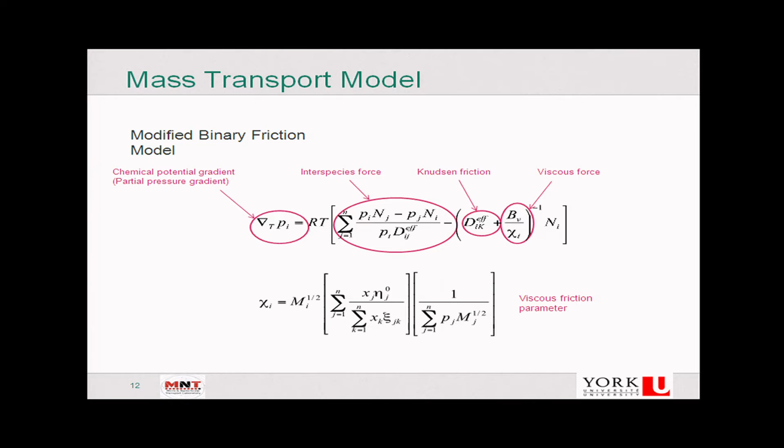There is a Knudsen friction because the flow passages are small, and then there is a viscous friction parameter which is derived through these kinds of expressions as well. So this entire process is very complex. It is not a simple Fickian diffusion, which will have only a concentration gradient and a diffusion coefficient. This is really quite complicated, and that's the challenge in the fuel cell. But hopefully you can appreciate that when you have a multi-component system with Knudsen diffusion, you have to deal with something beyond Fickian diffusion.

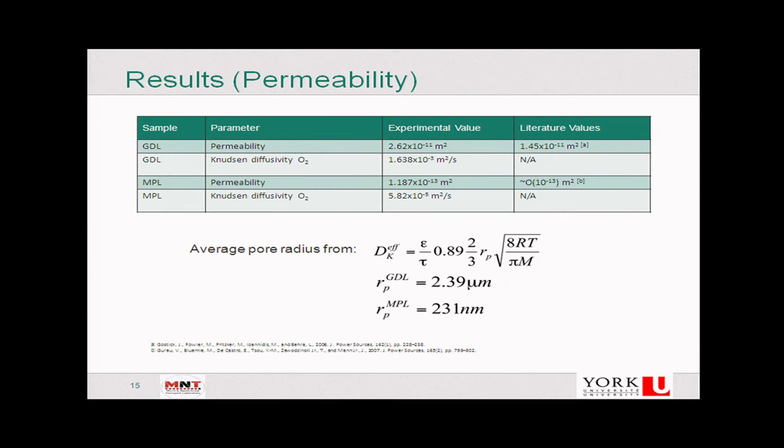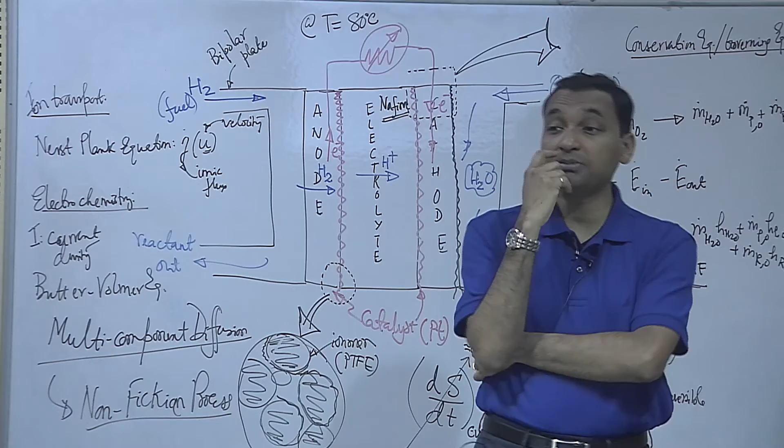Why these are critical is because most of the science of understanding the permeability and so on has been empirical. The critical parameter people have been using is the Bruggeman correlation. The Bruggeman correlation has been derived for spherical particles, to understand the diffusivity of porous media. But as I have shown in the scanning electron micrographs of these GDL and MPL, they are nothing close to spherical particles. These are fibrous materials, so of course the Bruggeman correlation doesn't apply.

That's the reason you need this kind of fundamental understanding of the porous media to derive the actual quantity. We can see that the diffusivity we measure is almost one order lower than what has been predicted by the Bruggeman correlation, which has been used quite heavily in porous media.

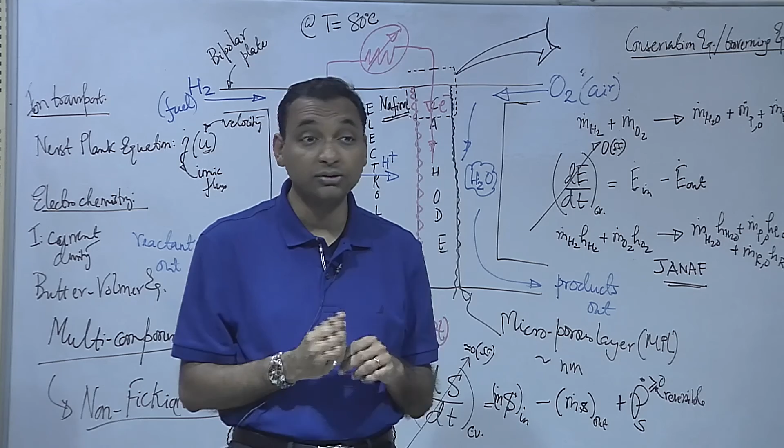So with this, these are the two kinds of energy applications. We could talk about a lot of other energy applications, but these are something I thought have some similarity with things in chemical engineering and other engineering systems you are currently doing. Any questions? We will take up the water part in the next lecture.